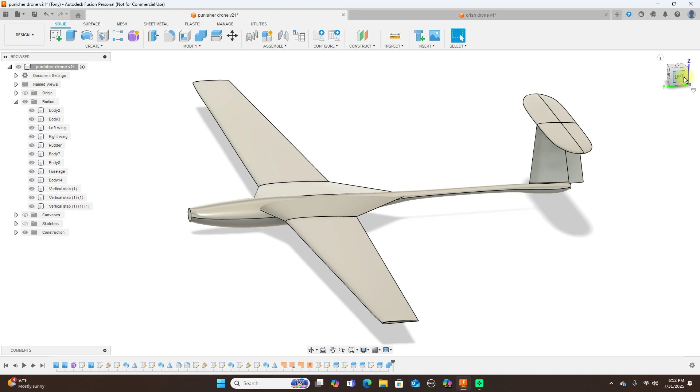Then what I did was create a sketch of it from all the pictures I gathered, just a pencil drawing of it. Once I got the pencil drawing done, the side view and a top view, I went ahead and put it in here and started working on it, and came up with this.

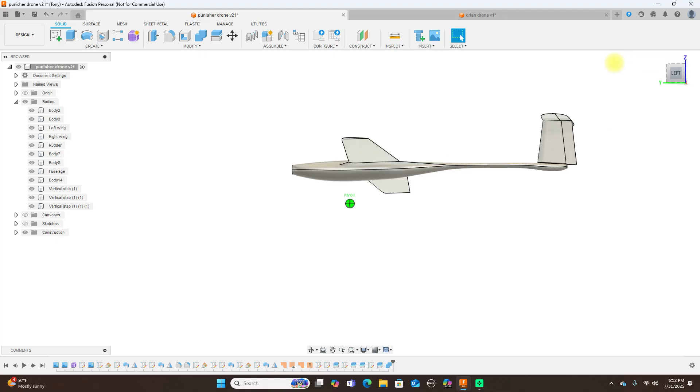I did a lot of research on what type of airfoil to use for the wings on this, then went ahead and used the airfoil I looked up. This is what I have of this, what I did - this is the form model, just using a form here in the center to get this fuselage.

So you just use a form, and once you have your airfoil that you're going to use, you do the center section here, then put another plane here and extend the wings out the rest of the way, with the airfoil here in the back.

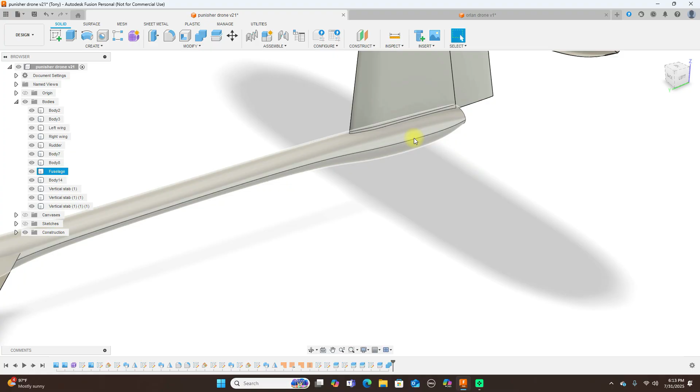Now this vertical stab, when I looked at the pictures, is more of a flowing type that goes in here, and I haven't done that yet. I'll make this flow into here so it's better looking, integrated as one piece there.

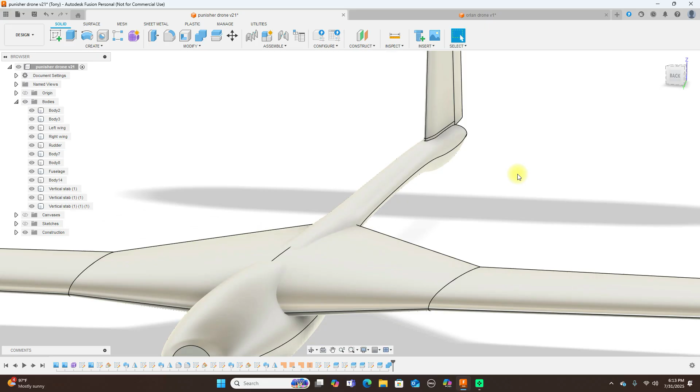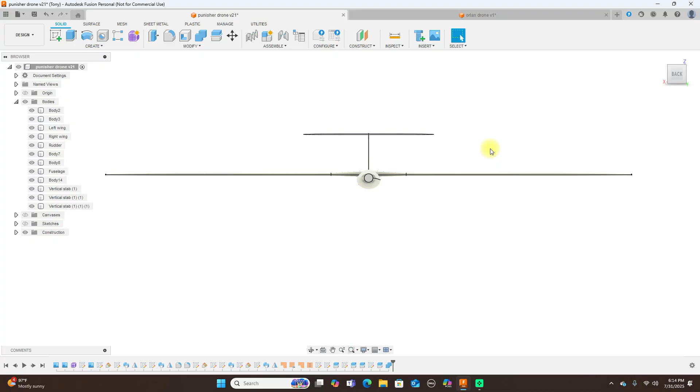Then I have to look up what size electric motor to use for this. If I do decide to make this, I'm going to make it out of fiberglass, making molds. This part here I'll probably just 3D print one and use that as a plug, then make molds from the plug.

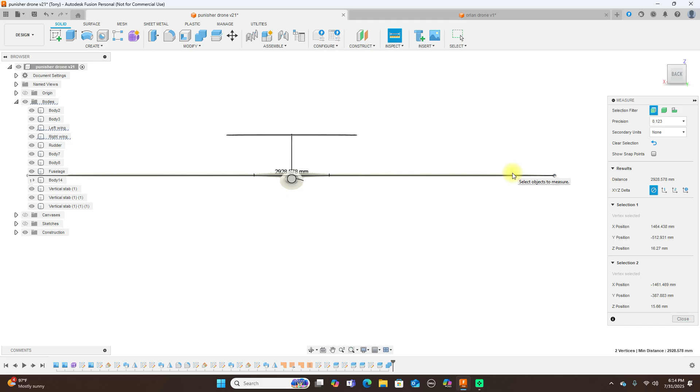But let's see, can we measure from here? This is just about 3 meters, 2.928, we're shy of 3 meters. It looks to be about 72 millimeters, something around there. No biggie.

I'm going to put this through a program - I'll be showing you guys that program in a week or so. What I'm going to do is put this in the program and see how it actually flies with this airfoil and all the airfoils I'm using here, see how it flies and performs. I'll be showing you guys that software here in a week or so.

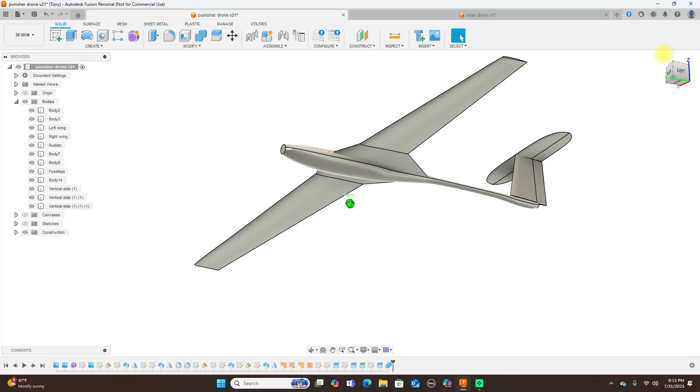So yeah, again, if you want to model an airplane and there are no plans for it, what you can do, like I did, is just get as many pictures as you can of it and sketch it yourself - a side view, top view, front, back. That's what you need to model the plane in Fusion here.

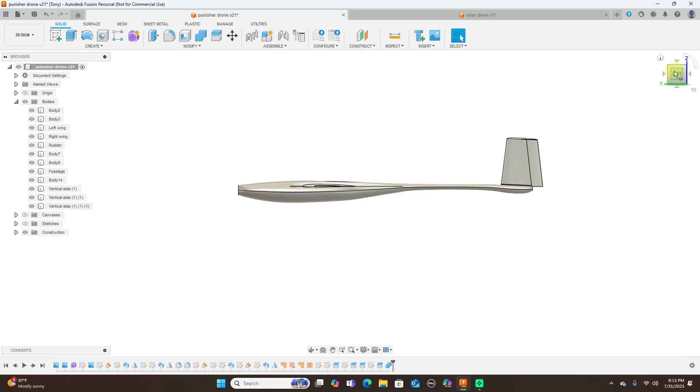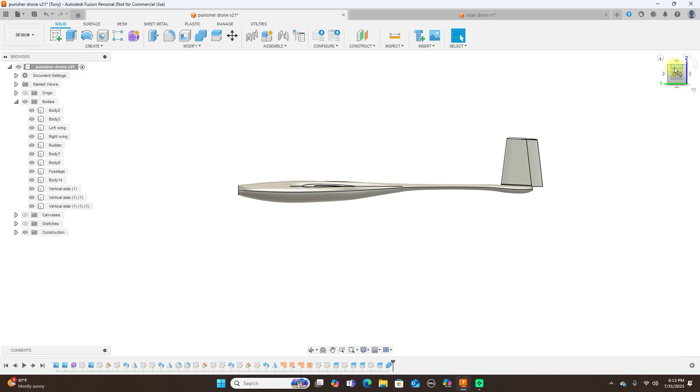So yeah, this is it here, and I haven't decided yet when modeling this or making molds for it, whether this should be split right here and this whole section comes up here. I'm not sure. I don't know how the real one separates through here.

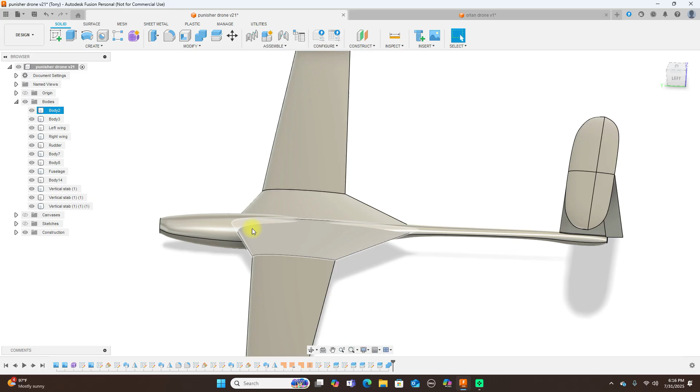I don't know if they do that or not, but I think that would be a viable way: putting a line here, and the center section will come up so you can access the internals in here.

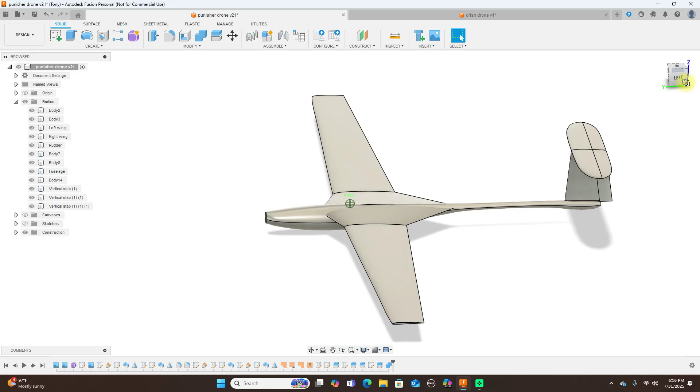So far, what I've seen, I haven't seen any control horns on the actual model, and I'm not sure if the servos and stuff are everything inside. I'll just have to do some more research and see how they did it for theirs. If I decide to make one of these, this is it.

Another drone that I was looking at, I didn't design this, I got this off GrabCAD. And this is it here. It's not an Orlan drone. It's similar looking to an Orlan drone, but it's not an Orlan drone like the Russians use.

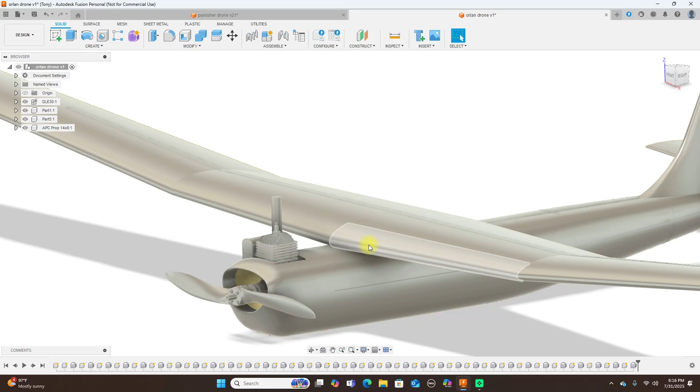This here has a DLE 30 in it, and propeller and stuff like that. It looks like a very viable drone here. There's work you'd have to do to make this a viable drone—just cut things in here and get all the hatches and servo mounts in on this. But like I said, I didn't design this or anything, I just thought it was pretty cool.

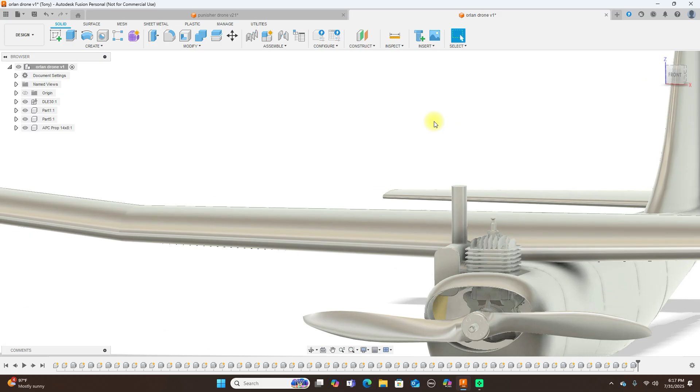And like I said, it's got a DLE 30 up here inside of here.

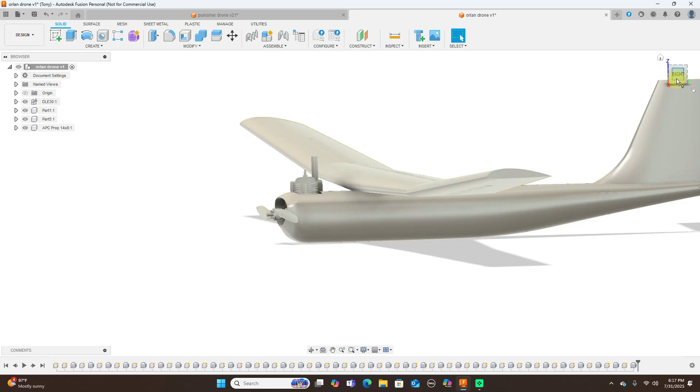So I would imagine if I were to make this—since I don't think these are solid bodies—no, they're not solid bodies. So the first thing I'd have to do is convert these and make them solid bodies here.

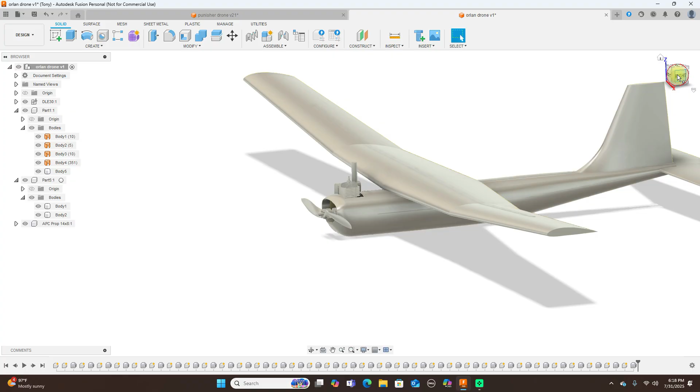And then make some of the mount for this wing up here. I have to see what airfoil this is actually on here. It looks like, just from the looks of it right now, possibly some variant of a Clark Y.

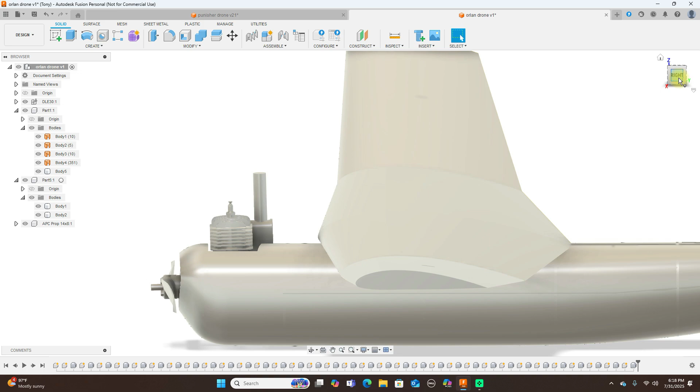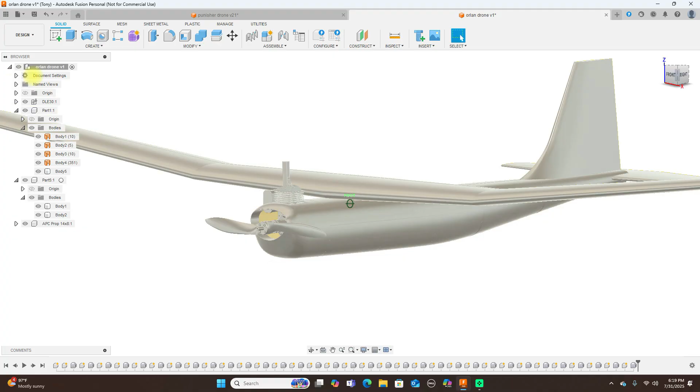This looks similar to an Orlan drone, but it's not an Orlan drone because the Orlan drone uses a Saito motor, and this is a gas motor. Saito's a glow motor using glow fuel. But this is nicely designed too.

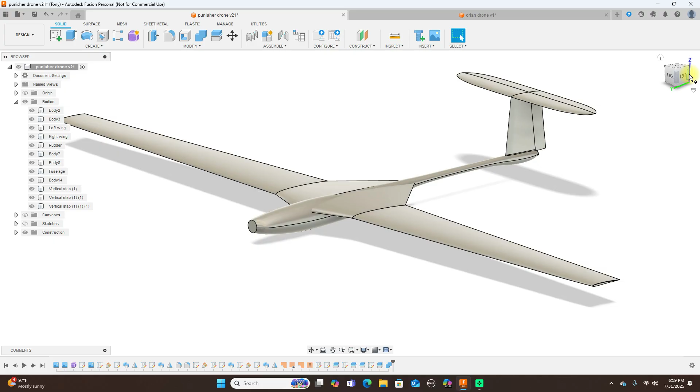Very nice. And this here, the Punisher drone, I like the looks of this over the other drone. This looks more sleek, sort of like a glider.

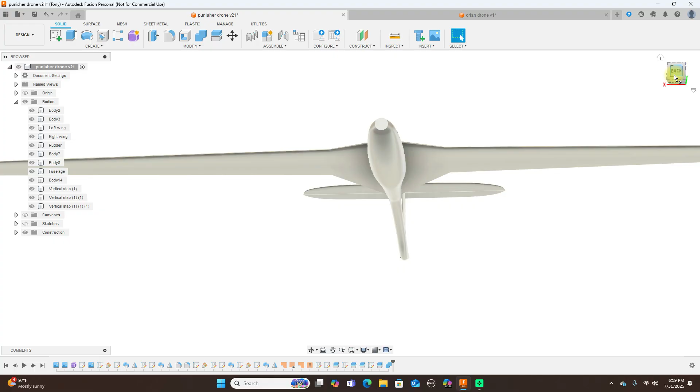And the width of this here is just at the widest points 130 millimeters, I believe. And 130 is just about 5¼ inches. So yeah, we can put a lot of equipment and stuff inside of here.

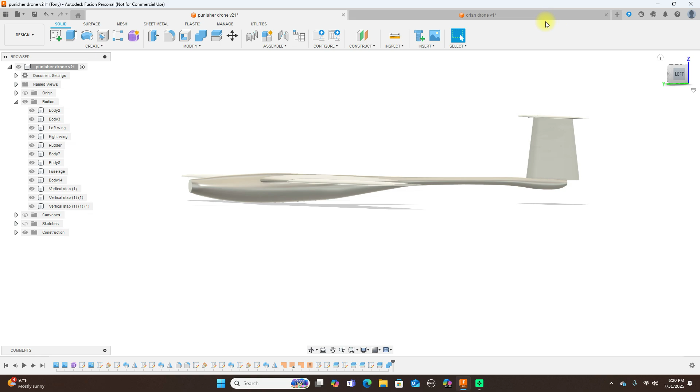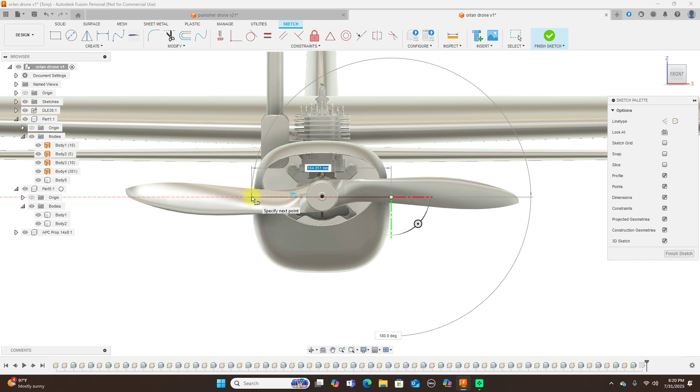And like on this drone over here, let's see how wide this is. So this looks to be about 164 millimeters wide, and 164 millimeters wide is roughly 6½ inches. So 6½ inches wide here.

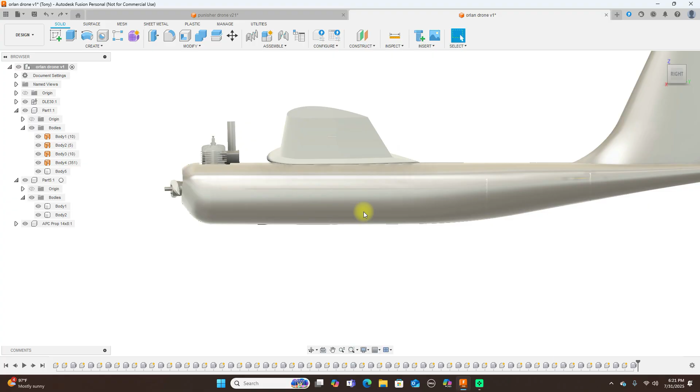And if you did something like this, yeah, this would be all open through here, and a lot of stuff you could put inside of here too. But when it comes to designing drones and stuff like that, there's so many parameters and things you have to go over and look at—you know, like the mission of the drone. What are you using the drone for? What's it going to be? Its primary mission, reconnaissance, or other things.

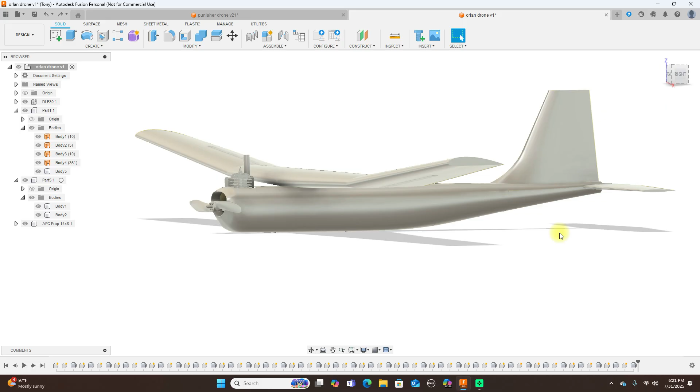And we want to know if it's going to be electric, or gas, or a combination of the two. Fixed wing drones is primarily all I'm interested in. Rotary drones, like quadcopters and things like those, are all fine too, but I like these fixed wing drones much better because they're airplanes.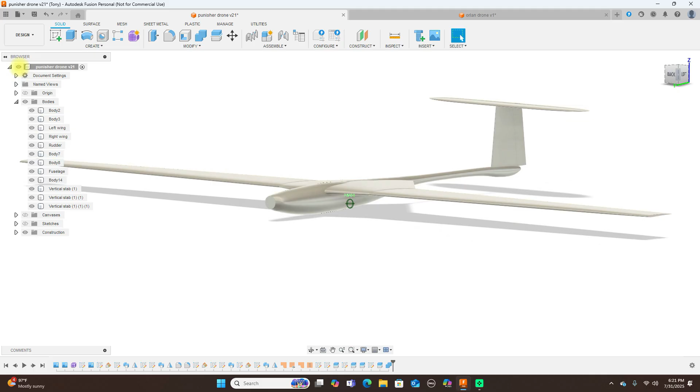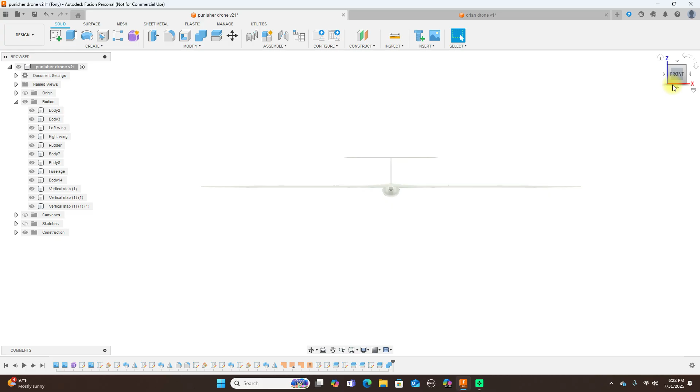This is what I have so far of this, and I've just got to do a little more work on it, and I'll decide if I want to make this or not. I don't know, I'll see how everything goes. But yeah, I just like the sleekness of it. It just looks really nice.